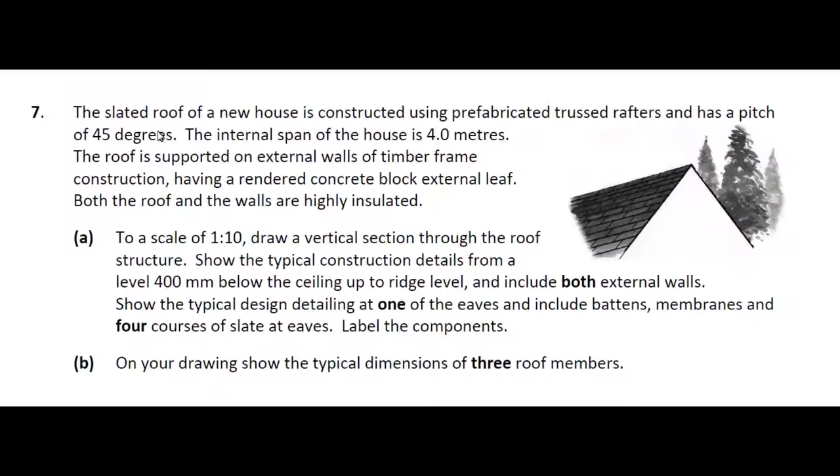In this video I'm going to take a look at question 7 from the 2017 higher level paper and offer a suggestion as to how we might answer the question. So starting with the question here, we can see that it's a slated roof. All these clues are in what we have to answer.

Prefabricated truss roof, so it's not a cut roof, it's a prefabricated truss. It's at 45-degree pitch. The span is 4 meters on the internal from wall plate to wall plate. And the roof is on external walls which are of timber frame construction, and the external leaf is block built. And we're told that it's highly insulated walls, and the scale is 1:10, so we know what we're supposed to be drawing in.

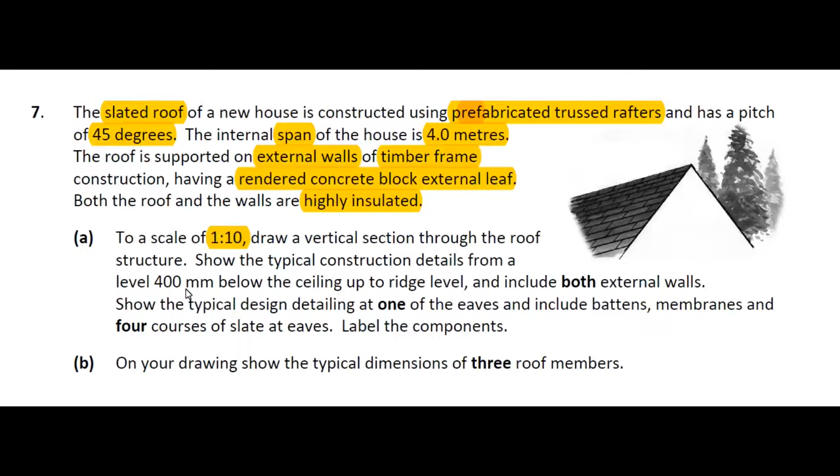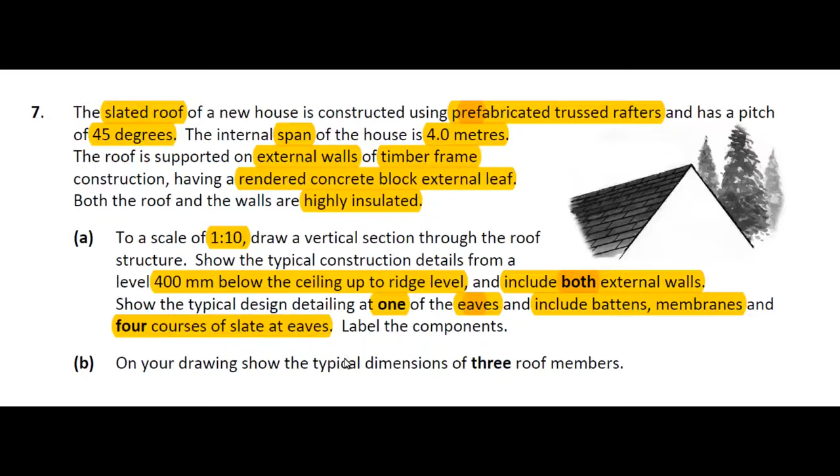And I have to show details from 400 millimeters below the ceiling, and we have to include both external walls, and only show detail at one of the eaves, and include battens, membranes and 4 courses of slate. And we're told here to label the components naturally enough. And part B is 3 roof members to be shown.

So to start with, in this drawing, it's an A2 page and the pitch of the roof is 45 degrees, so I've come very close to the top of the page and drawn 45-degree lines down both sides. I'm allowing a thickness of 150 millimeters for the rafters. It may be difficult enough to see there. And then I draw a centre line, and from the centre line I'm measuring my 2 meters left and right to allow for 4 meters between the wall plates. And then I can start to draw the timber stud for the inside wall of the timber frame.

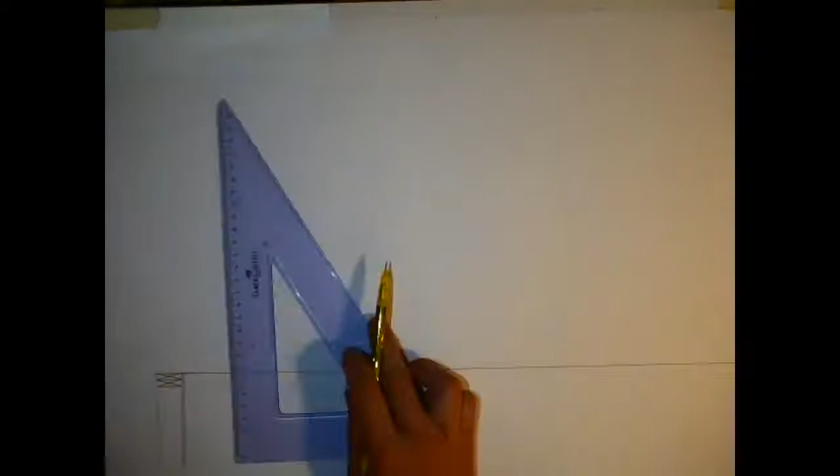Now I've taken it to mean that the internal span is actually from wall plate to wall plate. I don't think it would have really meant that it would have been to the actual surface of the inner wall, because you'll have your service cavity on that, and to be honest with you, it's a struggle enough to fit this on an A2 page.

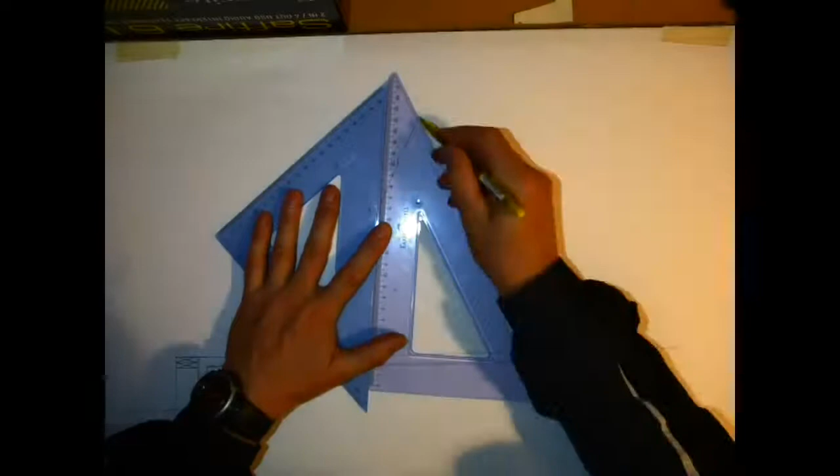And you can see there it's starting to build up here now where I have my ceiling as well. I come down my height of 400 millimeters below that, where I've drawn in an insulated slab or a service cavity as my ceiling there, and I've drawn in just the lines to a 1 meter interval and a single line, using it to draw the Fink truss rafter. And then I'm going parallel at 90 degrees with my measurement of 150 millimeters, so it's 15 millimeters for each of these here. And quite simply, half of the span is divided just to get that center point of the Fink, and it's 90 degrees as you can see there.

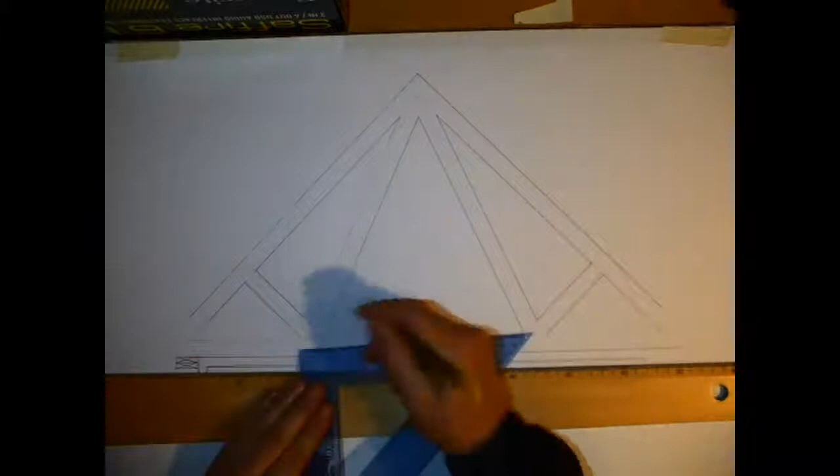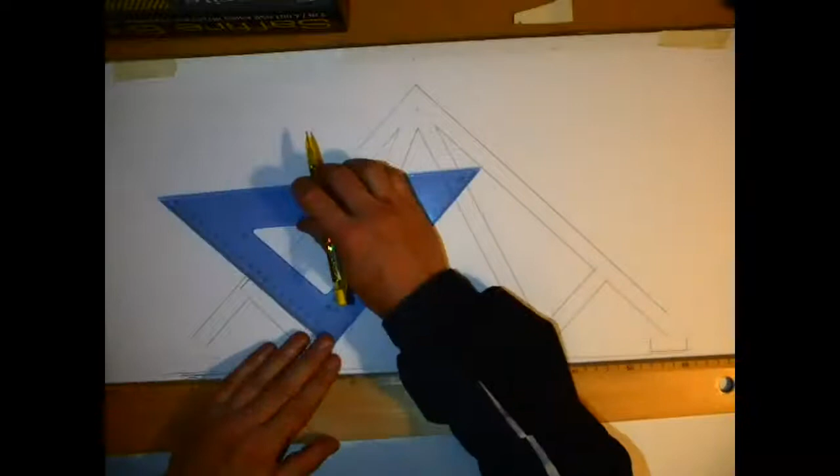I just went 45 degrees back in, and there's a little bit of maneuver at the top as well for where you actually place that. But the general shape of the Fink truss rafter is shown here, and it's all taken off centre lines. And you can see I'm starting to draw in the nail gang plates, not really measuring those as such, just whatever looks good. Different manufacturers would have different sizes and things like that. Some of them will be shaped at the top. I'm just going to draw a fairly basic triangular type shape for the nail gang plates anyway.

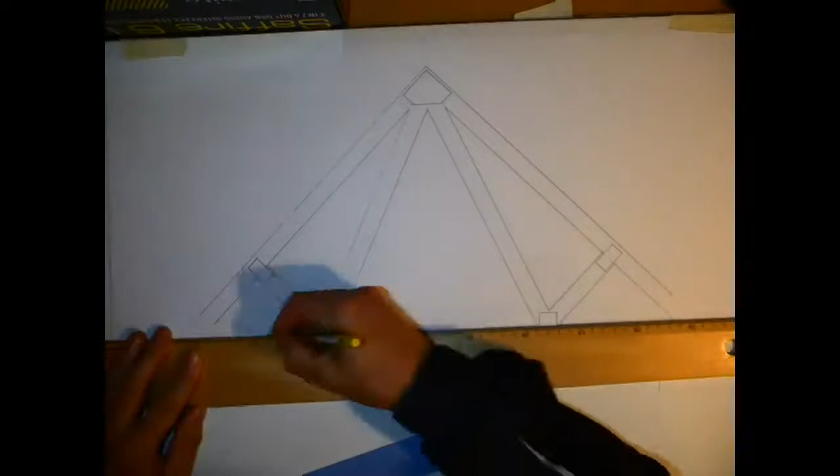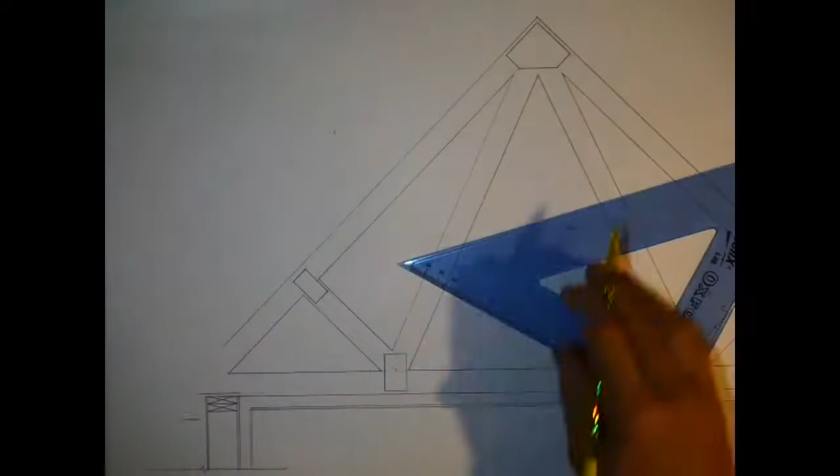And I haven't drawn the eaves heavy because I want to find out where I want to finish them off. It didn't tell me anything about a soffit size. I'm going to allow maybe a 300mm soffit. And we can put in the details we would have, like your double header on the timber frame stud that I've zoomed into here now. I'm drawing the block for the outside wall. All these things are mentioned in the question, and once you have those highlighted in the question, you know you're going to be getting marks for each of these that you put in.

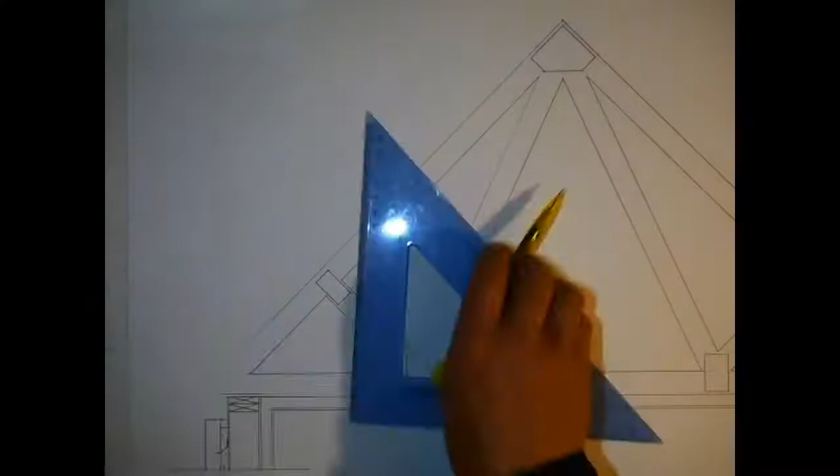So you can see there I have my wall tie placed in, I've got the cavity closer, each of the parts of the stud, the insulation, because it's in the question that it was a highly insulated wall. We've got the membranes, and the OSB board is used on the timber stud as well. It can be highlighted in: tilting fillet, fascia, soffit.

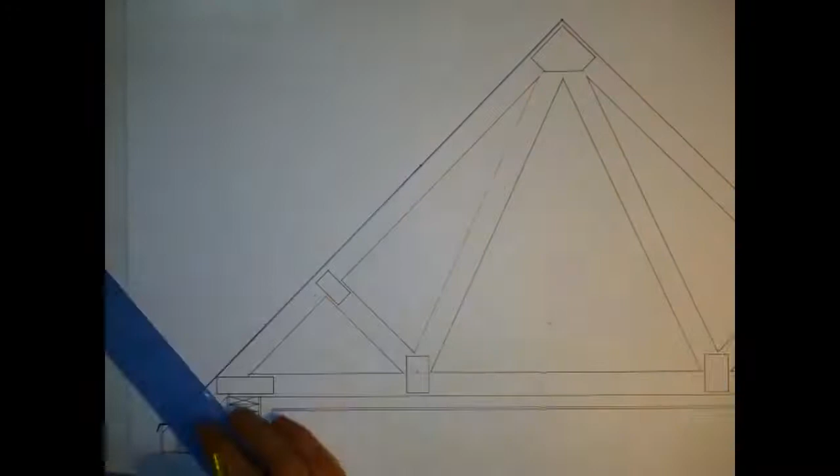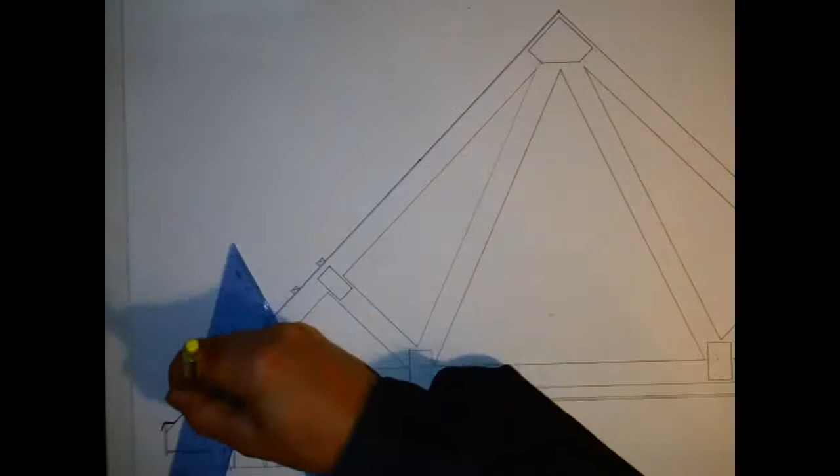All those things can be placed in and drawn in felt, or you could even put in an air tightness type membrane as well there. We've got, from earlier drawings that I've done, my slating details. Very simple once you go through the slating detail from before to be able to put those in. Time consuming, but fairly quick to do. And I'm not going to explain them here as it's done in the previous video.

And it asks for 4 courses of slate, so I'm working my way up here. I don't think you'll be penalised if you go one more, just that it has the laps being shown on them there. That's quite time consuming. It didn't ask for the detail. I don't think it's necessary to go through all the details of the eaves on the other side.

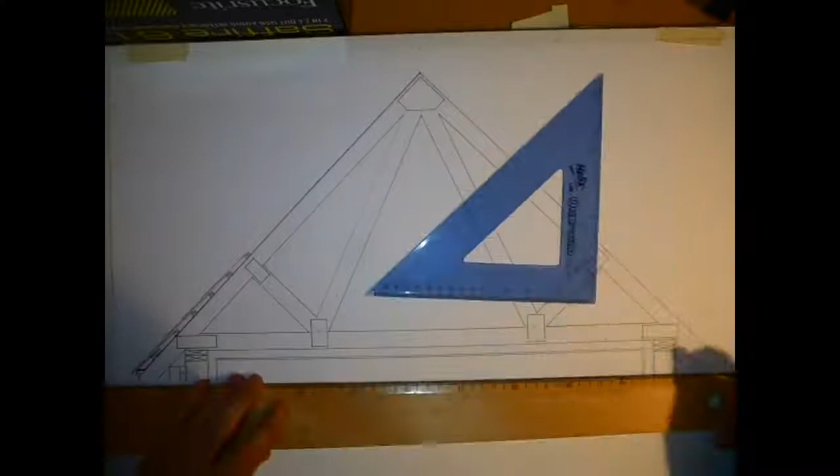It did ask in the question to include both the external walls, so I'm going to draw a little bit of detail here. In the exam, if I was pressed for time, I would probably only do the left hand side and maybe leave the outline of the other side without completing all the detail in it, because I drew this under the pressure of the clock, and the way you see it finished here took me the best part of 40 minutes, and you won't have that in an exam. So some shortcuts have to be taken to try and draw something like this.

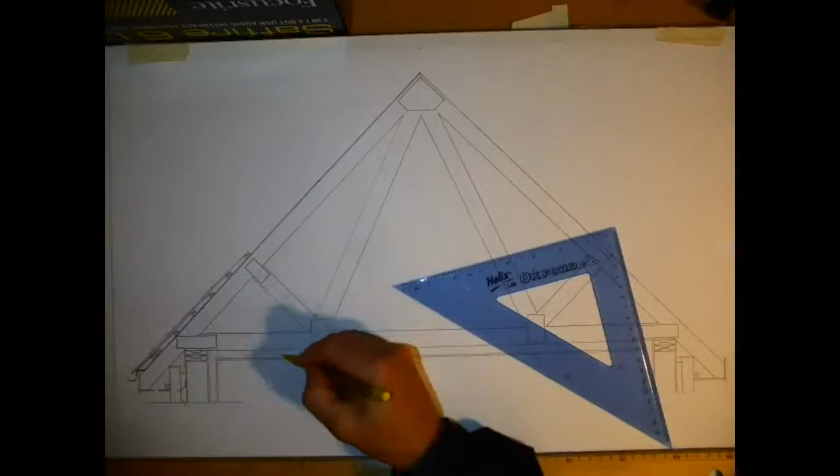As to why the scale is so big, I really don't know, because all the detail that you need is really up to the eaves. Half that page would have done. The insulation that I'm showing here, normally it's nice to put in that detail where you have the spirally line showing the insulation, putting in the eaves ventilator. But a little bit of colour will get us away without having to do a whole load of detail in there, because you're going to be beat for time in the exam.

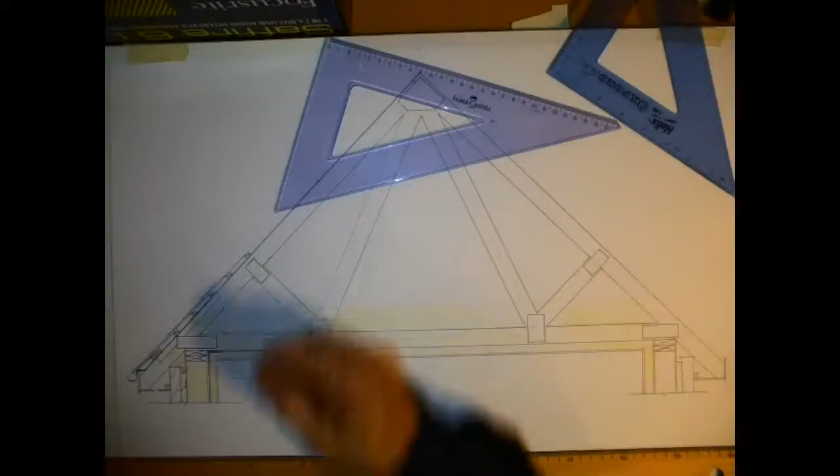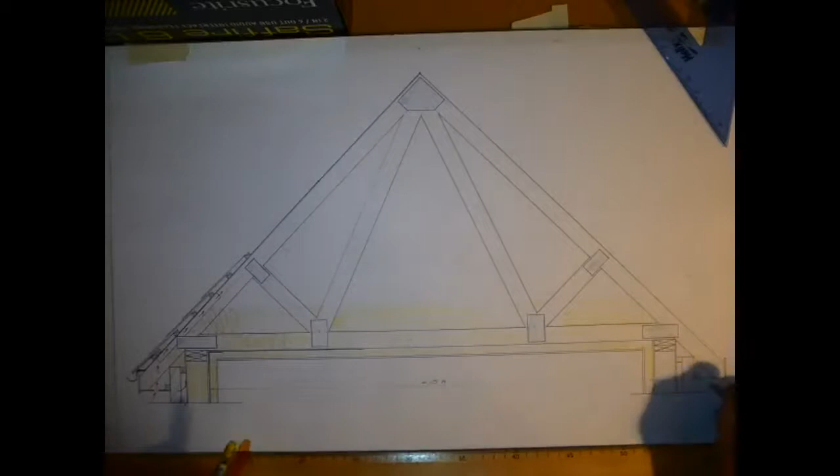You can see I've put in the air tightness tape and air tightness membrane as well, shown in there. We can label all these at the end. If you're really stuck for time, be aiming for something like 14 to 16 elements to make sure that you label them in. The question did specifically ask for naming sizes of elements, so I'd be very careful to make sure that I put in the sizes of elements, even though part B of the question is pretty low on marks, and I'm showing the wee ventilation space here that's shown inside.

So if you manage to get that amount drawn, you'd be doing very, very well. I would say concentrate maybe on one half of it and do one side very well, and the other side, under the constraints of time, as best you possibly can, making sure to label each of these things. It is even stated in the exam to label, so it's very important that when you draw something you go to the trouble of labeling it, otherwise marks will be lost. So as you can see, I'm labeling each of these elements that I have in. Just work your way through each of these.

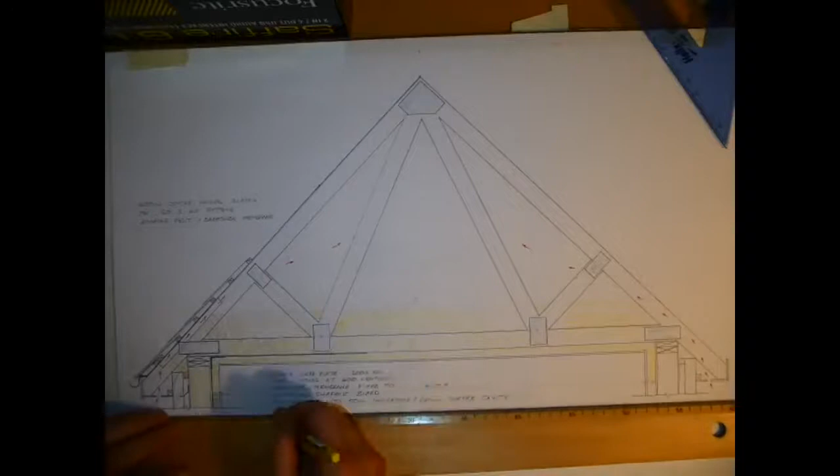I've mentioned quite a few of these before, but around the eaves details you've definitely got 6 if not 7 elements, like the closer, the wall ties, fascia, soffit, vent, etc. Battens, make sure you put in the size of the battens, your 50 by 30 or 50 by 40 battens, the felt, the breather membrane, eaves ventilator, truss, gang plates, 600mm centres for the truss rafters. Sizes that you want to have in for your trusses as well, like your 600 centres, 150 by 40. Put in the insulation size of 400mm mineral wool, and mention the U value that may be achieved by that.

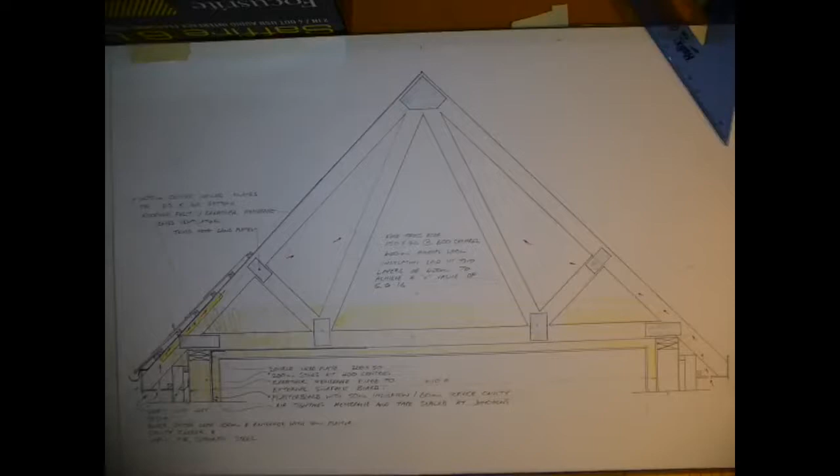The timber frame itself, the breather membrane, double head plate, which is 200 by 50, 200mm studs at 400 centres. They're the parts that you have to put in sizes for. Remember, it's something like 14 to 16 elements, and you're well on your way to full marks. Not the most challenging of drawings to complete, but within the time frame that was given, and the scale, the amount of stuff that you take in, that was where the challenge lay. So definitely well worth practicing something like this.